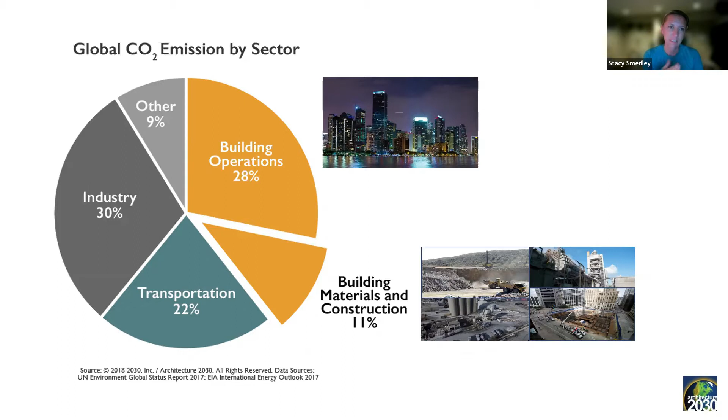But the building materials and construction sector, what we are manufacturing, things like concrete and steel, how we transport those materials to site, how we install them, demolish them, hopefully reuse them, all of that is in this building materials and construction or embodied carbon piece of the pie. We know that's at least 11%. We actually know that it can spill over into transportation and industry emissions when you're thinking about all of the components of getting a material manufactured and installed and put into place. So I now say that buildings and construction are at least 39% of global CO2 emissions, but likely more.

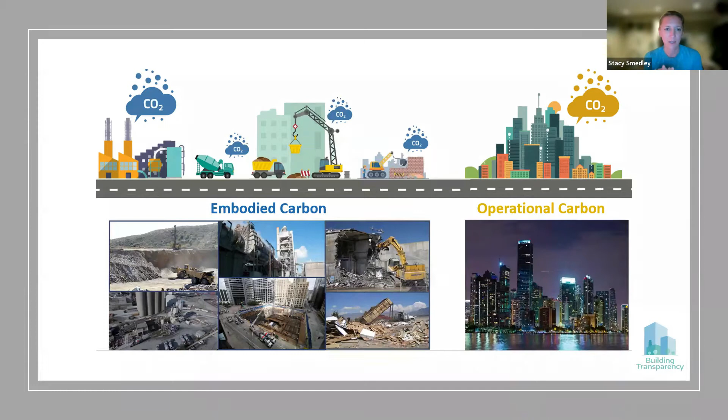And again, just a slide to put this into perspective in pictures. On the right, again, there's the operational energy consumption, how buildings are consuming energy over their life once we built them. Everything before that, and even during that when it comes to materials and how we put them into place, make them, and then replace them during the use phase, and then demolish them, again, is embodied carbon. So it's everything that a contractor touches along their part of the work.

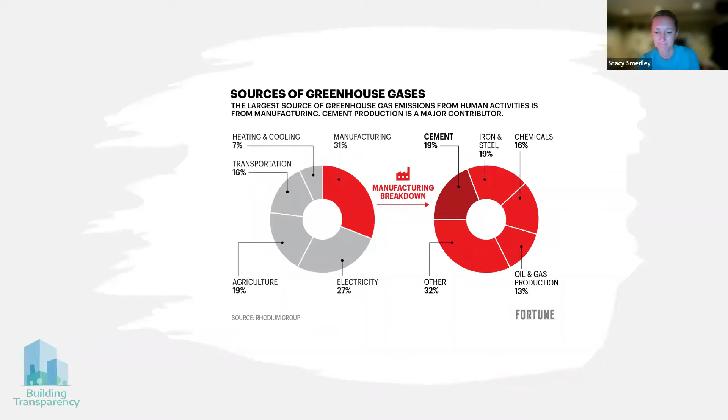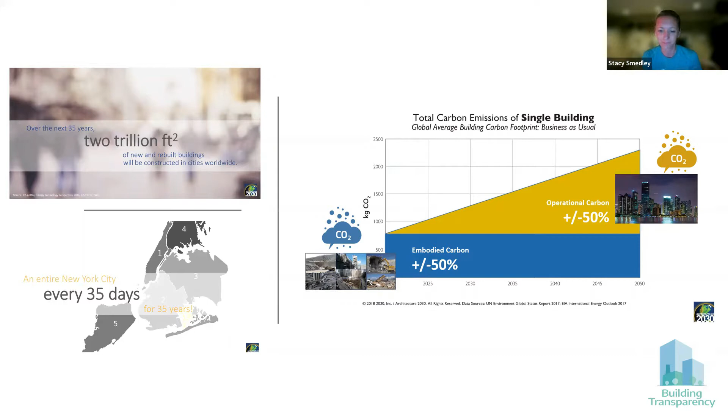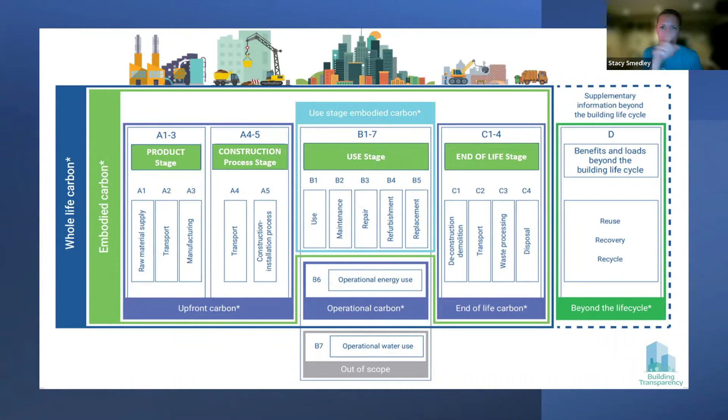Further along the line, you get into the use stage. That's how many times you might replace the material, something like the roofing or the cladding or the carpet. And you have to account for those additional emissions of those different replacements. And end of life is all about how we demolish projects, how we hopefully take materials out of the demolition phase in a way where we can put them into new materials, which then reduces the amount of the new stuff that we are having to extract over in A1 again. So it is a circle. That's what circular economy is when you hear that term thrown around.

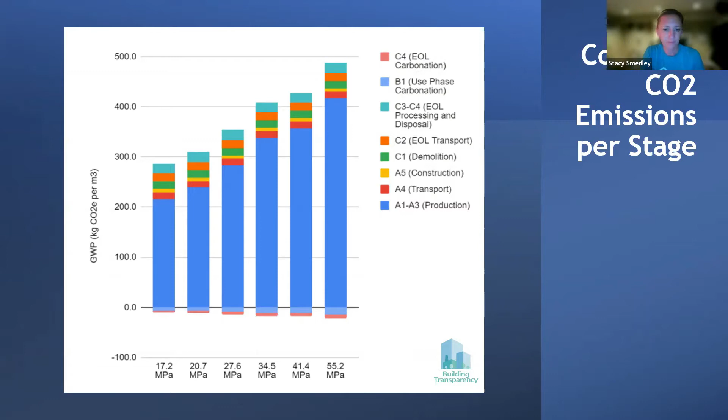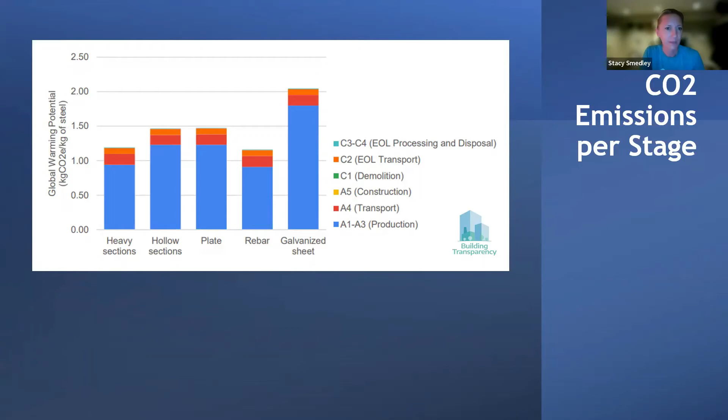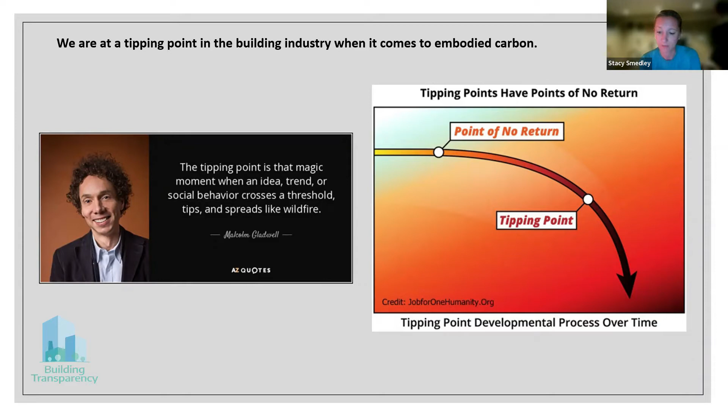So there's just the kind of the background, all the different terms, embodied carbon, upfront embodied carbon, the different stages where the impacts lie. And I think what's important that I always like to say now is that I feel like we're at a tipping point when it comes to how this data is now being understood and used. And I'm going to go through why I believe that after looking at this and really working on it now for 5+ years. The first is climate. So we are seeing more and more companies and policymakers focus on climate. That's largely based on what started with the Paris Agreement, where there was a commitment to try to stay under 1.5 degrees Celsius.

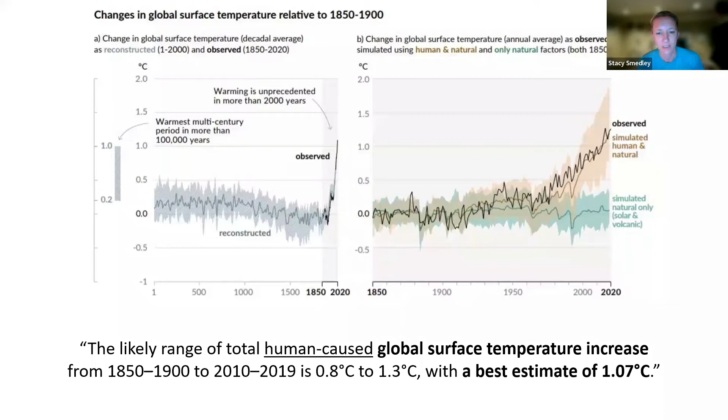Just in a few of my climate slides, the IPCC has put out new reports that are saying we're warming faster than they predicted when the Paris Agreement was put into place. And right now we're at somewhere between 0.8 to 1.3 degrees warming already.

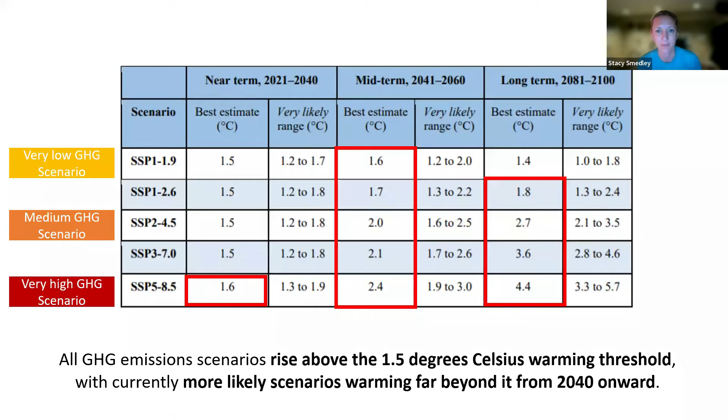And in the scenarios that they put out in the latest report, the best estimate for us is that by midterm, when most of us are hopefully still on this planet, in 2040, 2060, we're going to be above that 1.5 degree warming, even with the very best scenario in terms of how we're reducing carbon now. So it is urgent and we need to be focusing on it.

What's happening based on all of this coming out, as well as climate impacts being felt, is, again, more attention to this and more targets being set. So there are targets being set on both sides. The first is in the private sector. We're seeing large companies like Microsoft, Meta, Amazon, and others set their zero carbon targets on certain timeframes. Meta's is by 2030 across their value chain, which includes embodied carbon.

All of these include embodied carbon emissions of their buildings and the materials. Microsoft and Amazon are ahead of the Paris Agreement in the 2040, 2050 time period, all including, again, scope 3, which is where the building materials sit. So they're saying that by that time frame, they're going to have zero carbon in buildings that they are constructing for all of their uses.

So the first one is the city of Vancouver. What they are doing is setting whole building baselines where they're looking at the carbon emissions of a whole building and how it's made per square meter. They're requiring reporting of those emissions using a whole building life cycle assessment tool, which I'll get into a little bit later. And then it's including all stages.

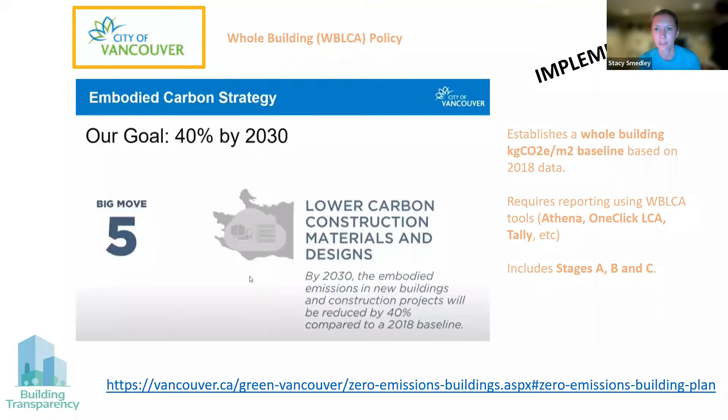So this is an example of a whole building approach where they're wanting to show reductions against what I call a building carbon intensity, or CO2 per square meter of building. It's very similar to an energy use intensity for operational energy, where you have a kilowatt hour per square foot per year. In embodied carbon language, you're doing a kilogram of CO2 per square foot or square meter. So that's at the city level in Vancouver.

In California, they've implemented the Buy Clean California Act. This looks at different materials, things like structural steel, rebar, glass, mineral wool insulation. And what they're doing is at the product level, setting requirements for disclosures through environmental product declarations. Those are third-party verified product level accounting of the carbon emissions per unit of material.

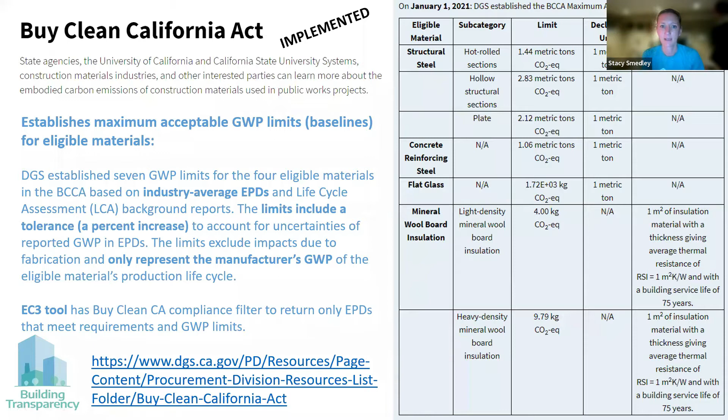So you can see over here on the right, what they're doing is setting a limit of how much carbon can be per unit for these different products. This means that any public project in California has to use materials across these categories that have these EPDs. The manufacturers have invested in that transparency and then prove that they're under these limits, and that is implemented.

At the county level, up here in Seattle where I sit, this is a county climate action plan for King County. They're requesting EPDs for concrete by 2022. So this is, again, very product level. And then requiring the EPDs by 2023. And then by 2024, establishing, again, a maximum kilogram of CO2 per unit of concrete that manufacturers have to be under with their mixes. And they utilize EC3 for compliance there. That's the tool that we manage.

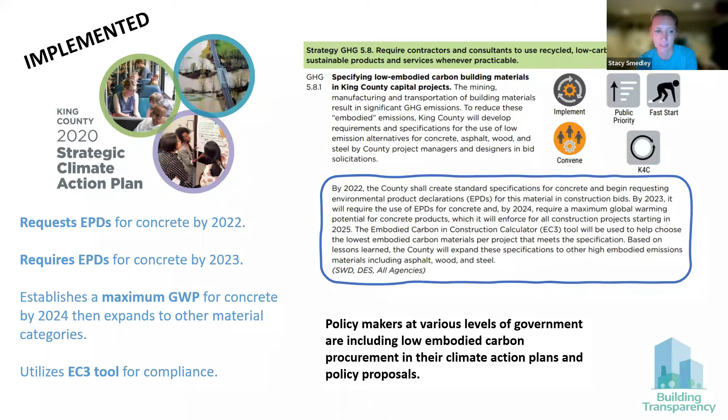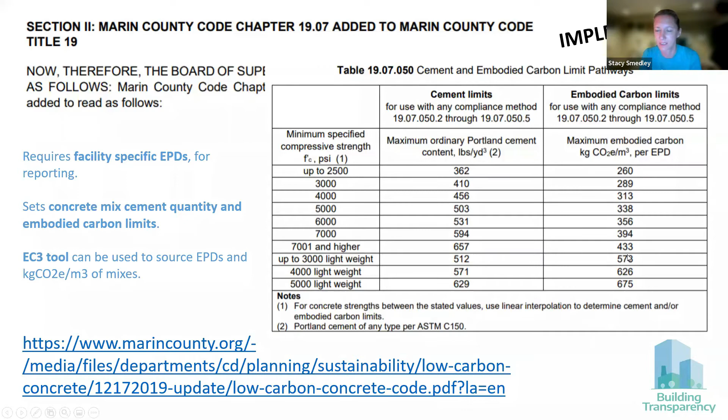Again, at the county level, this is a Marin County code down in California for concretes. Again, I think hopefully you're seeing a trend here on the product level. It's requesting these EPDs for reporting and then setting limits for the carbon intensity per cubic meter. So again, the same process, each jurisdiction is just setting their limits based on their data.

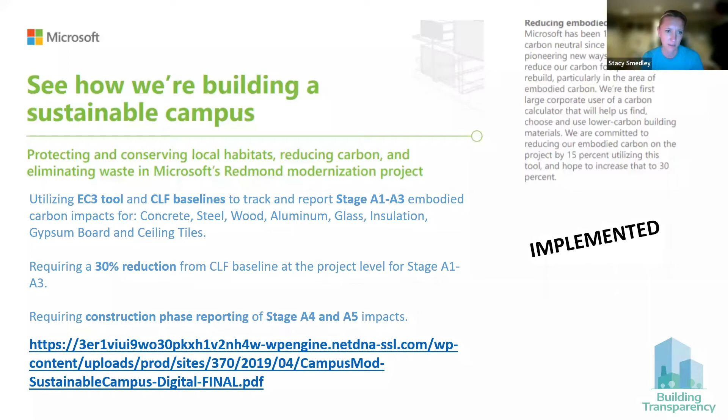On the private side, this is happening too. So Microsoft is utilizing EC3 and CLF baselines to track and report A1 to A3 impacts, those product stage impacts across a group of material categories, and then requiring a 30% reduction against the baseline at the project level for that stage, again, that product stage. So requiring EPDs, setting a limit, and setting a reduction.

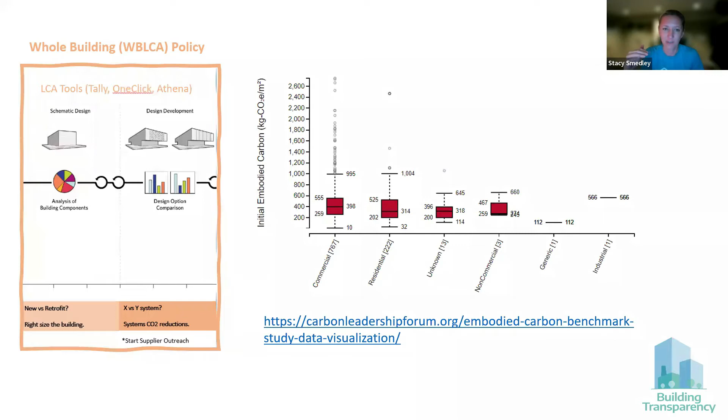What this does is allow things like this to start to happen. This is a benchmark study where Carbon Leadership Forum took a whole bunch of these whole building life cycle assessments for different project types, like commercial, residential, and started to look at the ranges of those carbon intensities per square meter. So you could start to understand what a relevant baseline or estimate could be as a starting point. 500 is really what we typically see in a lot of these places; if you're just trying to gut check a project, if you're around 500 or under it, you're about where you should be as a starting point.

At the material level, this is again where you are requiring environmental product declarations for a specific list of construction materials. You're setting kilogram of CO2 targets or limits per unit for those construction materials. You're requiring EPDs for disclosure of that information. You can utilize EC3, which I will show you in a minute, to display the compliant EPDs, and then the projects have to submit their project data to show that they're under those limits for the group of materials that are part of those disclosure requirements.

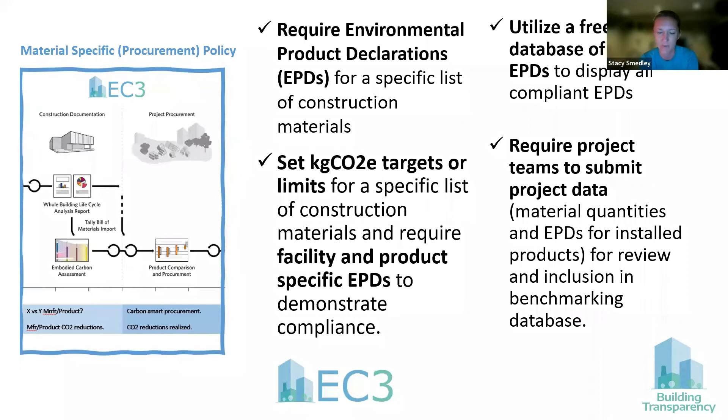Just a little bit more about EPDs, because it's important that these are understood. These are really where we can get to those product stage A1 to A3 impacts, and where all of these policies are pointing. So they are third-party verified life cycle assessments at the product level. There are ISO and EN standards that are followed to do the life cycle assessment at the manufacturing plant for a product, where you're getting all of the material ingredient inputs, you're understanding where they're coming from, how far they're transporting materials to their manufacturing site, the energy profile of their manufacturing process, any emissions that are popping out, things like cement kiln emissions for concrete mixes.

All of that gets accounted for following those standards. There are product category rules that are followed to actually, per product, provide guidance on and requirements for what you must include in the EPD. And then there's third-party verification on top of that by a program operator that basically makes sure that all the standards and rules were followed before the EPD is published.

They are like nutrition labels for building materials. Largely, they are PDF documents that are multi-page, but there's this very important and valuable table that can be on page 2 or 8 or 12 that really has that carbon intensity data.

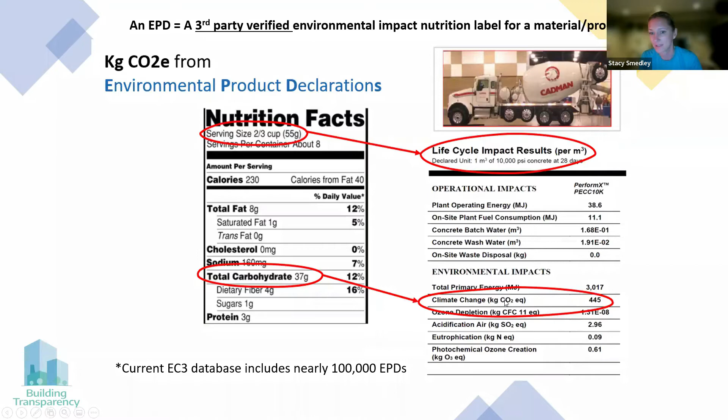So if you think about it like when you look at a box of cereal and you see the serving size and how many carbs you have for your 2/3 of a cup of cereal, if you're on a low carb diet, you're trying to get that carb count down. The same is true for an EPD for a building material. You have a kilogram of CO2 equivalent per unit of material, and you're trying to get that carbon down when it comes to building materials. When it comes to the material, yes.

There's a comment in the chat box here. Sure. We have a person who was in a small meeting with people involved on the construction side of our industry discussing this topic, for example, EPDs. I said the contractors have a role in reducing embodied carbon, and a couple people said they don't have say in the materials. It's what the designer specifies. I said they could make recommendations to use materials with reduced embodied carbon. It didn't go over too well. What are your thoughts on that?

Yeah, I agree with you that there is a role for the contractor to play, and I can walk through some examples of that when we get into the tool. But even with the screen I'm on here, what we're seeing contractors do, our major partners right now on the contractor side are Skanska, Turner, Webcor, Multiplex, Obayashi, and Mortenson. So we have got some contractors from all over the world that are now engaging with this. What they are doing is creating carbon estimates using EC3 and showing that to the owners so they can understand that there are reductions that are possible.

And then during bidding and procurement, requesting EPDs for things like concrete, where they're looking for 3 suppliers to bid, for instance, and just being able to demonstrate the cost and the carbon emissions next to each other. So you might not be able to say you're going to go with this supplier or that supplier. The owner is going to make that decision. The architect's going to set the basis of design. But just like you get cost data during estimating and during bidding to make decisions, you can have that carbon data right next to it because it's open data that you can access.

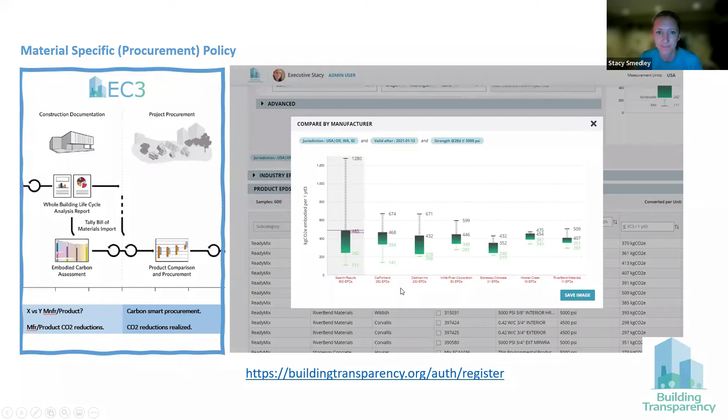So the point of all of this is that as these baselines and reductions are being set and more data is being turned in and submitted to show compliance, what we'll see is both the building level and the product level baselines or limits move down. And that's exactly what's happened with energy code as we've gotten better at designing more efficient buildings. The requirements for how low your EUI is against a baseline building have gone down, meaning that the energy consumption is going down.

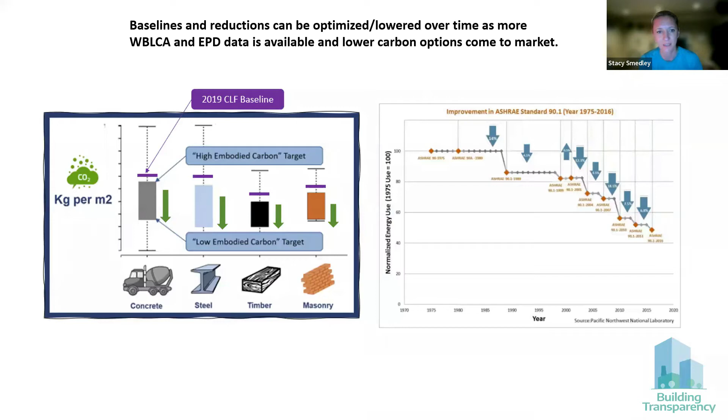The same thing is true on the carbon intensity of building materials. As we begin to do this work, we are seeing that manufacturers are competing on this and reducing the carbon emissions of their products, which is what we want. And this is just my kind of cheeky slide that I've used before when I'm doing this kind of baselines versus benchmarks. You know, who will win? My son loves the shark versus train book, so I use it as my little analogy.

A lot of folks think that it has to be either whole building level or procurement level, and it can't be both. So it's this versus, which one should I do? Or is it a carbon per square meter baseline versus a GWP limit for a product? Which is better? It depends on what you're trying to do. There's strengths and weaknesses to both, and they both are important.

So we tend to say it's good to have a building level target. So you're optimizing as you're designing, you're trying to use less materials. You're looking at different materials, concrete versus steel versus timber. Make those decisions, optimize your building, and then look at the materials very specifically and make sure you're procuring the lowest carbon material in each category. So if you do both together, you're really driving the carbon down across the whole process.

And neither are perfect right now, and that's okay. So when you're looking at these things, the data continues to get better. The tools continue to get better. We are filling gaps in data as we speak, but we have to start now with what we have because we don't have time to wait for perfection.

So that's what's happening with the policies. They're seeing that. They're including materials they know we have data for today on the procurement side. They're starting with high-level benchmarks on the whole building side. And again, we'll get more and more accurate and more specific as more of this data is developed and as more people understand how to do this work.

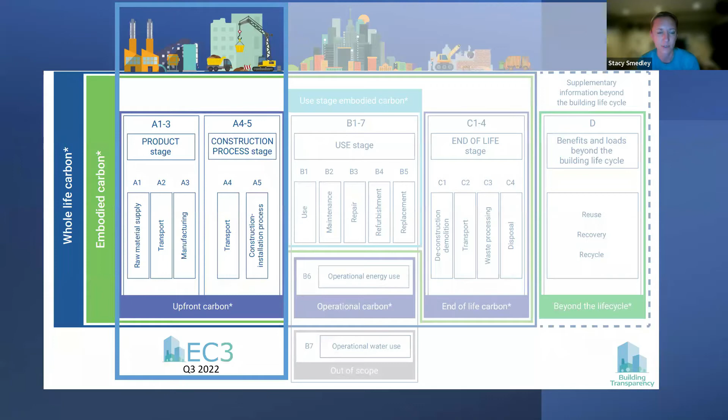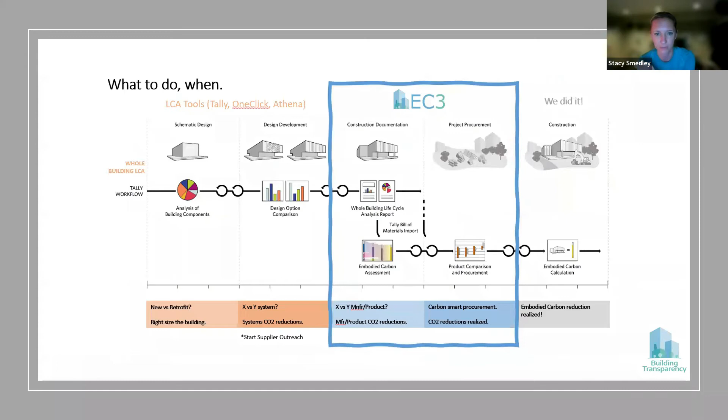And then again, we're really focused on specs and procurement. Whole building lifecycle assessment happens earlier with those LCA tools that are really trying to optimize the design. We are looking at material categories and specific carbon intensities during spec and procurement to really try to make sure we are procuring the lowest carbon option in EC3.

And then just a cartoon slide, it's better when I get into the tool, but really what we're doing is carbon estimating. So we have a database of these EPDs that's free and open to search and sort. You can compare materials, look at different suppliers and products, and then you can use your material quantities from a construction estimate or a BIM model, import that into the project planner in EC3, and begin to understand where your impacts are across your project, and then show reductions as you begin to pick products.

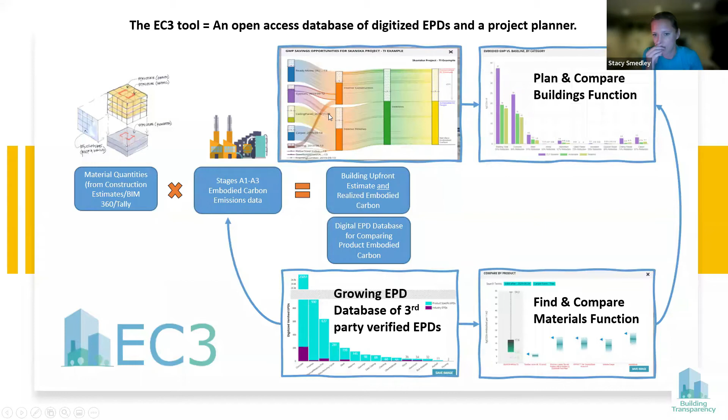And with that, I am going to go into a demo of the tool. Please, as I'm doing this, ask questions if you have any, as we start to get into the tool and how you use it. You can register for free at Building Transparency, just an email address and login, and then you can sign in. So I'm going to go ahead and just sign into my account. And once I'm in the tool, I'll just kind of orient you to how you would engage with this if you were trying to do some work.

Sorry, my computer is being a little slow. I might have to use my slide deck. Give me 1 minute.

There we go. So now I'm in EC3. What you're going to see first is that I've got my presence in the tool. It's telling me what kind of user I am. But really, the most important thing about the tool is the data. So at the current moment, this is telling us how many of these EPDs we have per material category globally. And if I click over to concretes, you're going to see that we've got a digital process where we're getting mix-specific EPDs for concretes. That means we have over 38,000 currently valid concrete EPDs in the US, which is, we're leading here on that.

And you can click through this and just understand where we're having EPDs for things, getting into how many product-specific EPDs we have. You can see again, total we have 81,000 concrete mix EPDs, over 3,700 EPDs for finishes. In total, we're about 98,000 EPDs in the tool, with concrete mixes being a lot of that based on how many you could have per plant.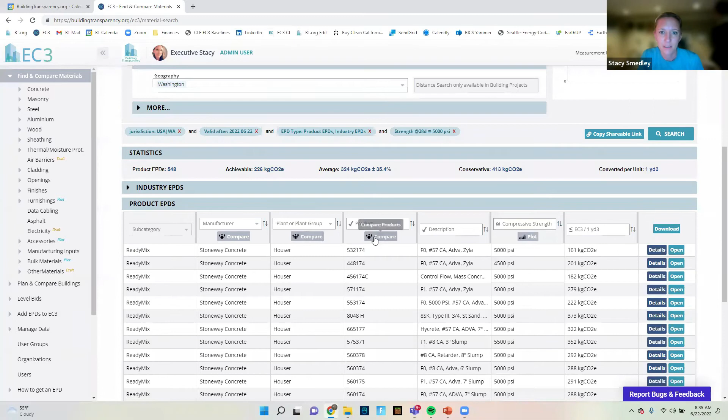You can also compare at the mix level. So if you knew you had mixes from these different suppliers that were in a bid that were comparable, you could start to filter that in the tool. And at the mix level, I'm just picking a couple randomly. You'd be able to see there's Stoneway's mix and there's Cadman's mix. You have the mix ID, and if you had a choice in your procurement, Cadman's mix would be a lower carbon mix. And again, I picked those at random, but you could get as accurate as you needed to with your mixes and your suppliers.

You can do this for any of the material categories. So the same thing is true for steel. Let me go into rebar, actually. Same thing. I could go in and I could just look for US suppliers of rebar. And I could begin to understand who's disclosing and who's the lowest carbon option by plant. So there's me doing it by manufacturer.

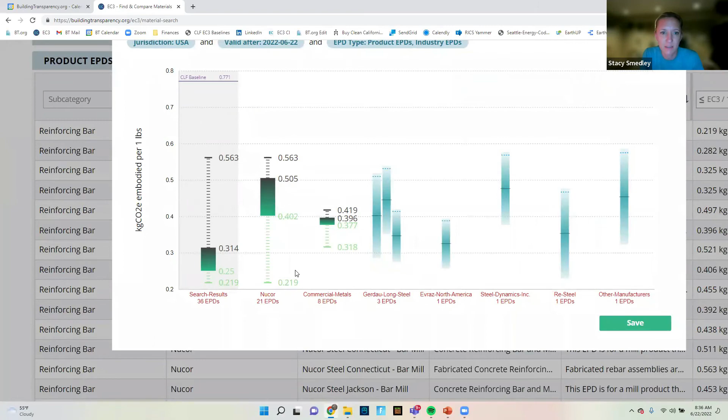You can see the range, like here are all Nucor's plants. There's one that's really low, there's one that's really high. I wanted to understand which plant was the lowest for my procurement. I could just filter to Nucor, and then I could compare by plant. And now it's going to show me Nucor, and their Seattle plant's the lowest right now.

And that's really based on the energy grid here. But that's a level of detail you can get into when you're trying to dig into this data and use it. The other features of the tool, real fast, are the building levels. This is where you could do that carbon level estimating at the building level. So if I just go to public buildings,

this is where you can add a building project, start from scratch. You can import from BIM, and then you can build a project. It's going to show a house, to be simple. But here's a house: you're putting in the type of project, the square footage, the construction start date, the location.

If I scroll down, what you're going to see is this very much looks like a bill of materials estimate, where you can have your description, your quantity, and your unit. But instead of cost data being here, what you're seeing is the carbon intensity of each of these things.

And that is very much through the same thing I just showed you, where you can go into the searches. You can search by radius or by geography, get to the collection of data that you want to use to understand what's possible for the carbon intensity of your concretes, and then even select an EPD to see how your actual EPD, your product, is comparing against that range of what's possible.

So that's really what the owners and even the contractors are doing. Even the designers, they're using this data to set those project level carbon intensity targets. What's possible? What am I realizing based on the products I've selected? And then reporting this number to meet their reduction targets that they've established.

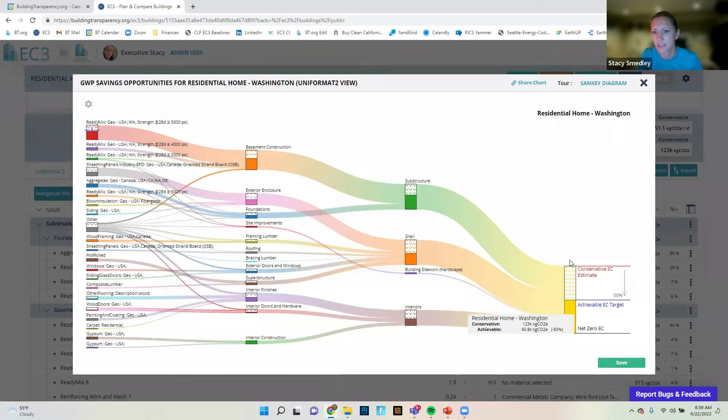And then the last thing, just for the construction lens, we do have a level bids form where you can create a bid sheet. And I'll just pick carpet just for fun. You can create a bid sheet, and this is where you set it up for a project. Down here, you can put your different bid items, the quantity of the product you're talking about.

And this is how you can download that as an Excel file. This was a feature that the GC has actually asked us for, to be able to start to show this data next to cost. So there's the cost, there's the carbon content for each of these products.